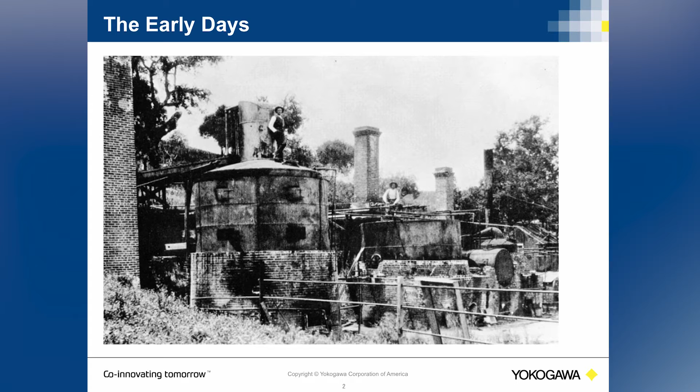Water tube boiler patents can be found dating back to the 1700s. Both types of fired systems, boilers and process fluid heaters, were very crude in design and relatively small in scale up until the 1910s and 1920s. As the demand for capacity increased in the residential, commercial, and industrial sectors, so did the size of the fired systems. This coincides with the understanding of heat transfer and the development of quantum theory and its application to fired systems.

While working on a neighboring boiler's oxygen analyzers, I was able to see the first boiler installed at the old Gulf refinery in Port Arthur, Texas, which is now Valero. It was built before 1910 and was put together with no welding, only rivets. Kind of shocked me. We have come a long way as an industry since these days in the design of fired systems.

However, very few changes have occurred in the science of flue gas analysis and the use of these measurements in controls and protective systems.

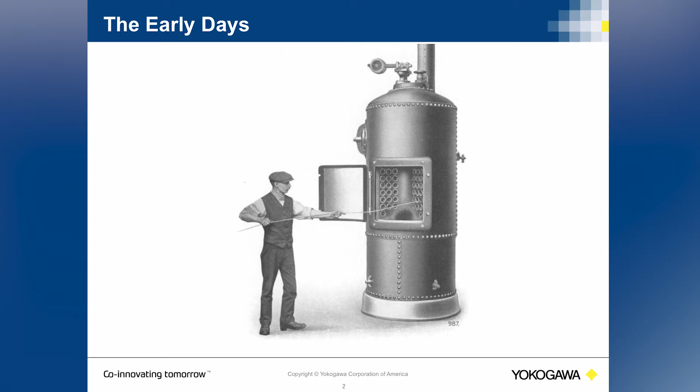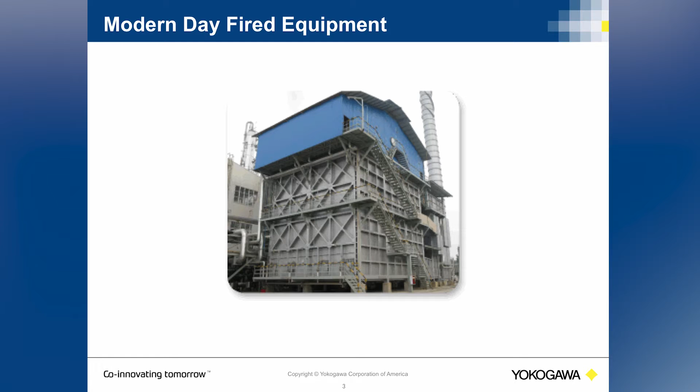Today, fired heaters have taken on many forms and are designed for very specific functions. The modern-day process fluid heaters commonly used in refineries were developed in the late 1940s and 50s. The basic design elements have changed very little, though materials of construction have had some advances in thermal efficiency. The companies that design them have an intimate understanding of the purpose of flue gas as it relates to transferring the generated heat into the process fluid, whether it's used for vaporizing, cracking, or just heating.

This understanding of the impact of flue gas composition is largely lost between the heater designers and the people that are actually operating them. These folks in the field responsible for maintaining and operating the equipment are very aware of the potential hazards associated with the fired systems.

Also, most fired heater manufacturers are not responsible for the controls, instrumentation, or protective systems, but rather only build a guideline of how it should be operated. This missing link between an ideal design and antiquated approach to controlling the equipment has only recently been addressed.

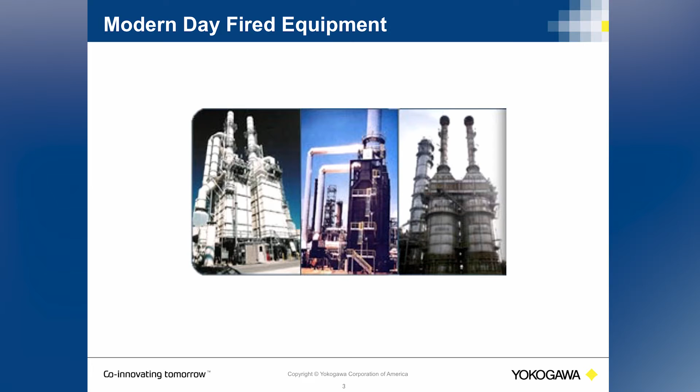While boiler codes such as the NFPA 85 go into a great deal of detail on how the equipment should be designed and maintained, there is very little information on how the flue gas should be instrumented, controlled, or used as part of a control system or protective system.

This vacuum for a baseline of design has led the American Petroleum Institute, which is the largest collection of users, to build a recommended practice for oil and gas-fired heaters, which was released, the latest version released in 2008.

And in the absence of a universal standard for process fluid heaters, such as the NFPA provides for boilers, several petitions were made to the API to elevate the status of their recommended practice, number 556, to a standard so it could be used as the benchmark for the design of protective systems.

I've had the good pleasure of sitting in on these 556 meetings twice a year for the last few years, and I'm very proud of the progress they've been able to make in this area.

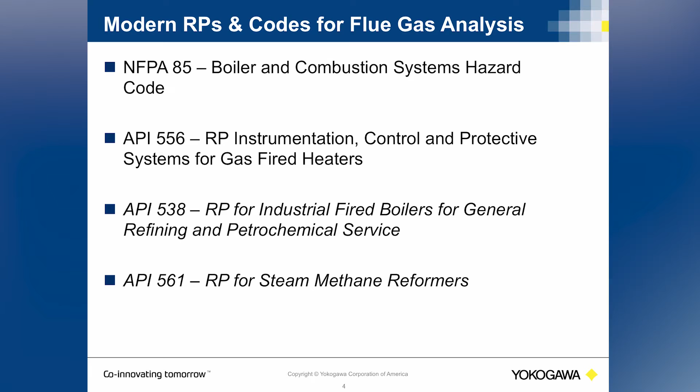And to give you an idea of the magnitude of relevance fired equipment has in our world, here's the breakdown of the total energy consumed in the manufacturing sector just in the USA. These statistics were gathered in 2002, which was the last time the U.S. Department of Energy delineated the data into these types of categories, which includes fired heaters and steam generation.

The total consumption in 2014 was about 27 quadrillion BTUs of energy, or 27,000 trillion BTUs of energy.

Assuming these percentages are close to the 2002 values, that would equate to over 18 quadrillion BTUs of energy consumed just for fired processes in the USA. As we will cover in this presentation, even the most state-of-the-art heaters are only about 60% efficient at transferring the heat energy from the fuel source into the process fluid.

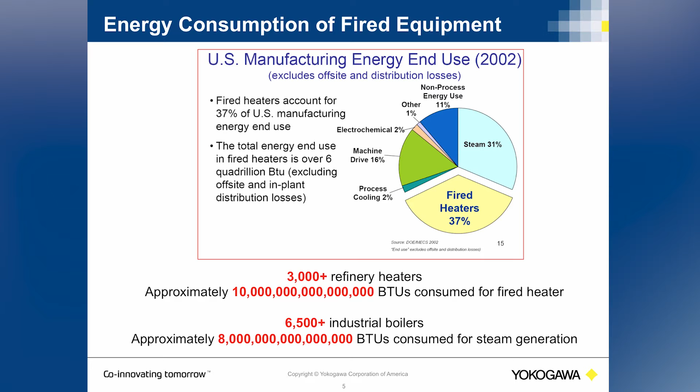That brings us to today's topic of flue gas, which is the byproduct of oxidizing fuel and air. As heat energy is a major component in most industrial processes, the most common way to obtain heat is by burning fuel and oxygen. Burning pure oxygen poses many risks and requires the separation of nitrogen, so the common medium for oxygen is just to use ambient air, or in some cases even preheated air.

Fuel can be anything that burns, but in most industrial settings, that would be coal, fuel oil, or a mixture of hydrocarbons and hydrogen. The ideal product of this process is a mixture of water vapor, CO2, and nitrogen, and it would also produce heat.

CO2 and water vapor are the critical gases in the mix that actually radiate the generated heat. Nitrogen and oxygen do not absorb or emit any substantial level of heat energy, and increasing their concentration in the fuel-to-air ratio would only dilute the flue gas.

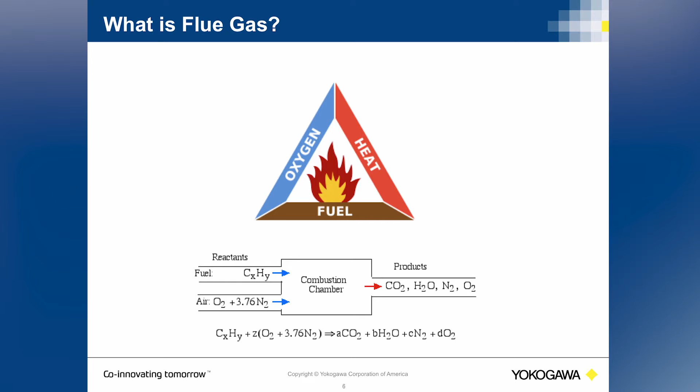Theoretical air, or the amount of air to completely oxidize the fuel with no oxygen left over, would only provide the byproducts of nitrogen, CO2, and water vapor. This is what we would call a perfect stoichiometric mix.

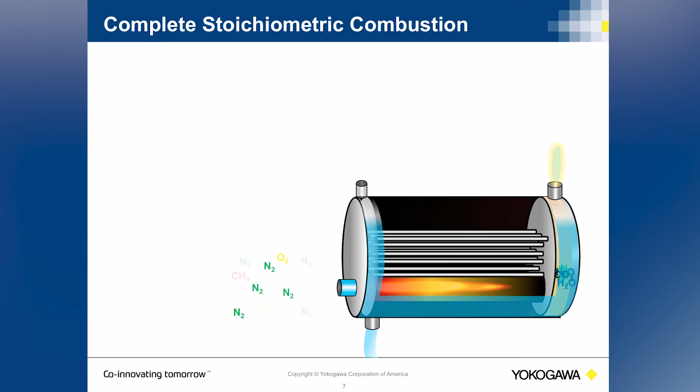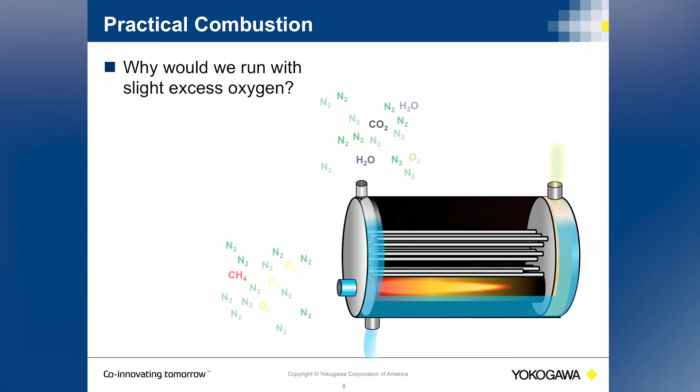What you should see in the field are systems running with a minimal value of excess oxygen, as is the intended operation of the system design.

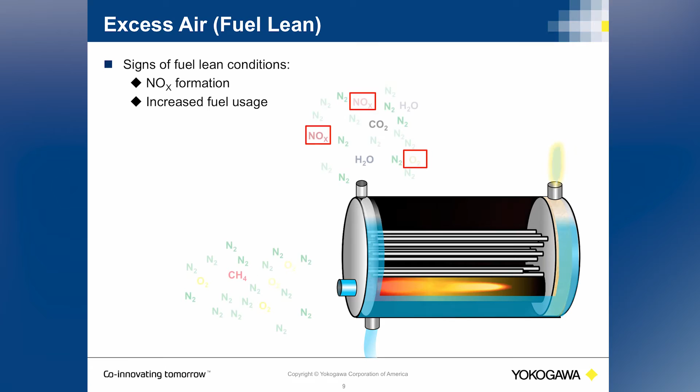Unfortunately, most fired systems are operated with elevated levels of excess air. Nitrogen and oxygen dilute the water vapor and CO2, and in high levels react in and around the flame to form NOx, which is a heavy pollutant.

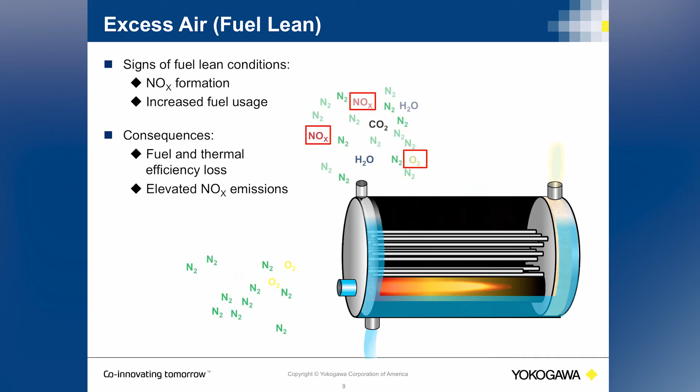If the air-to-fuel ratio goes fuel-rich, the byproducts would also include CO, possibly hydrogen, and if there was enough fuel present without enough oxygen, the flame could possibly go out and even be producing fuel. So if methane was the fuel in this case, on this little Scotch boiler, you would see the possibility of methane going all the way through the flue gas.

The possibility of pouring these combustible gases into a chamber that is already on fire is the most common reason operators prefer to supply very high levels of excess air, which in their mind acts as a safeguard.

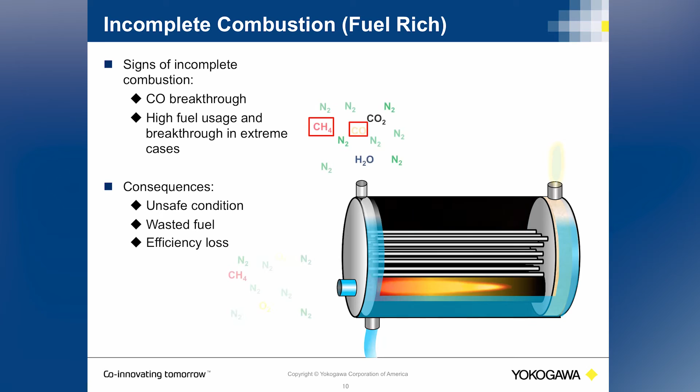Another consequence that's not commonly known to running a system with a fuel-rich mixture is also a loss in flame temperature, or a less temperature in the flame.

Although there have been many advancements in fired heater construction and use, very little change with the instrumented systems relating to the fuel to air and the mixing.

When fuel systems were first on the industrial market and sized accordingly, fuel had a very consistent air demand, as it was either a constant flow of pulverized coal, fuel oil, or natural gas.

As industrial facilities grew in size, many of them learned to capture the off gases around the plant and mix it into the fuel. Unfortunately, the instrumented systems have seldom been upgraded to adapt to the continuous fluctuation in air demand.

Most facilities that use gas for fuel measurements do account for BTU content, which typically goes to the environmental governing body, but that BTU content is not used in any type of feed-forward design for a control system.

So what you'll see on most typical systems in the field, on the fuel side of the fuel-to-air ratio, is only a volumetric measurement of fuel. And there's also a control valve that's typically controlling the pressure that is manipulating the amount of fuel delivered to the burners. But there's no compensation for a density change.

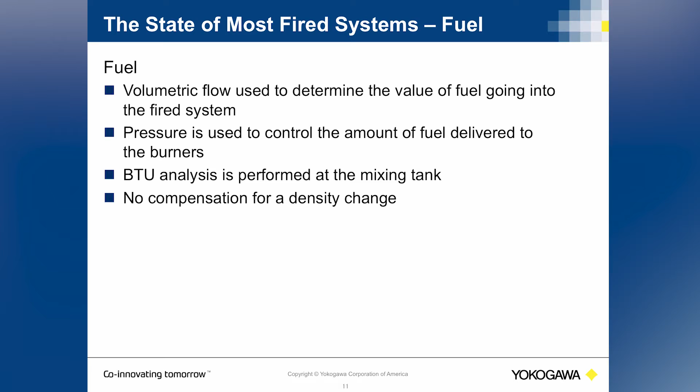So not all gas forms of fuel have the same type of air demand. And here's an example.

So if methane was used as the primary source of fuel, you can see that 1 mole of methane requires 2 moles of oxygen. Well, again, we're not putting pure oxygen into the burner, we're putting air into the burner. So subsequently, 1 mole of methane requires about 9.5 moles of air.

Well, if the system were to go propane rich, which does happen in refinery settings, 1 mole of propane requires about 5 moles of oxygen, and the result is you get a higher value for CO2 and water vapor. 1 mole of propane would require 23.8 moles of air. So the air demand of propane is 2.5 times greater than the air demand of methane.

Very few systems in the field have any type of feed-forward information for a rapidly changing fuel content, and this is where the systems rely on the feedback measurements of the flue gas analyzers.

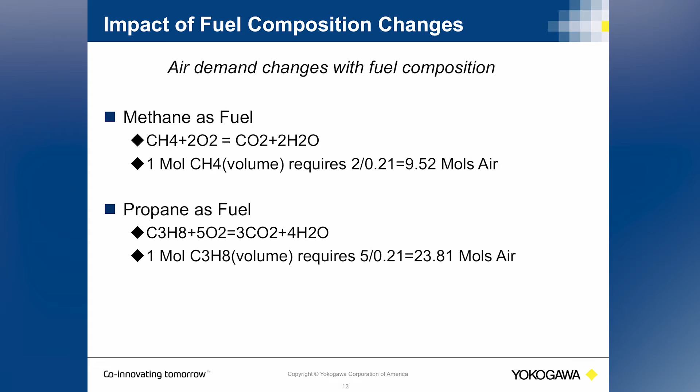On the air side of the systems, very few fired systems actually measure the air flowing into the burner, and fewer still have the ability to modulate the airflow to keep up with a changing fuel source.

Fired systems have many different types of motive forces for the air to move through the heater. There are systems that use a forced draft, with a blower to push air into the burners. Some use an induced draft fan designed to pull air through the heater. A balanced draft system has a fan on both sides, the high and low side of the heater, to create a constant flow in both directions.

But most refinery fired heaters are what we call natural draft, and they use the buoyancy of the heated gas inside the flue to continuously pull air in, creating a vacuum inside which naturally allows the air to flow through. In all cases, there are some typicals.

One of those is that there's no air measurement of volume of air flowing into the burner. So, like I said earlier, there's no density, no mass flow of fuel going into the burner, nor is there an airflow going into the burner.

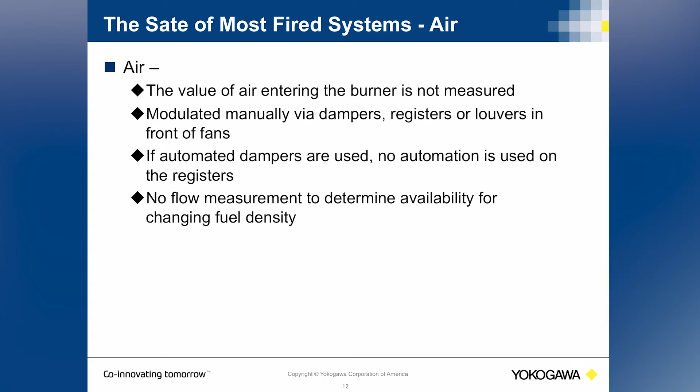No matter the fuel or air control mechanisms, the design of the system is to operate with a minimal concentration of excess air in order to facilitate the required heat transfer. It is well understood through practice that there are efficiency gains by operating with less excess air.

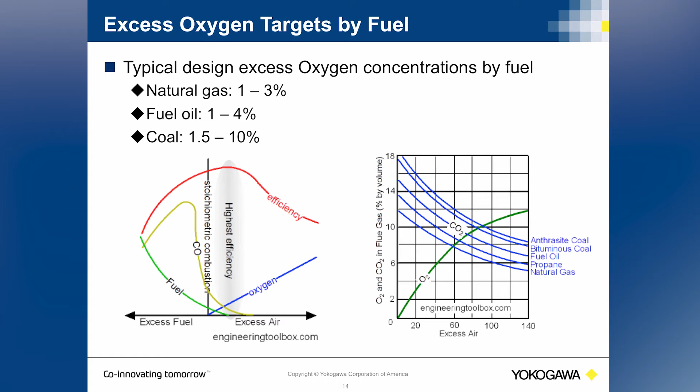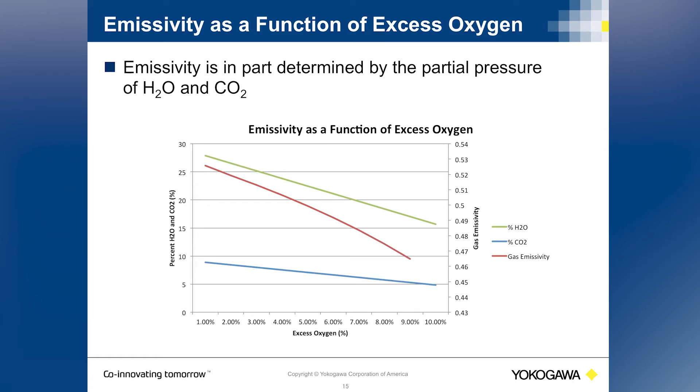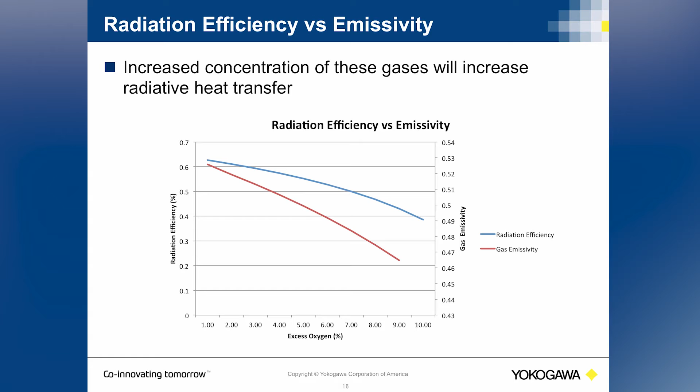And whenever you impact that partial pressure, not only are you diluting the critical components for heat transfer, but you're also affecting the gas emissivity overall. And as that gas emissivity drops, the loss of heat transfer falls with it, or radiation efficiency. The net result of increasing the excess air is the requirement of more fuel input into the system to compensate for the loss in radiation efficiency.

And they went out into a reactor to make hydrogen. They were operating the system at about 7% excess O2 and wanted to lower it as much as they possibly could. So we built a calculation to show them what the gain would be, taking it from 7% to 1%.

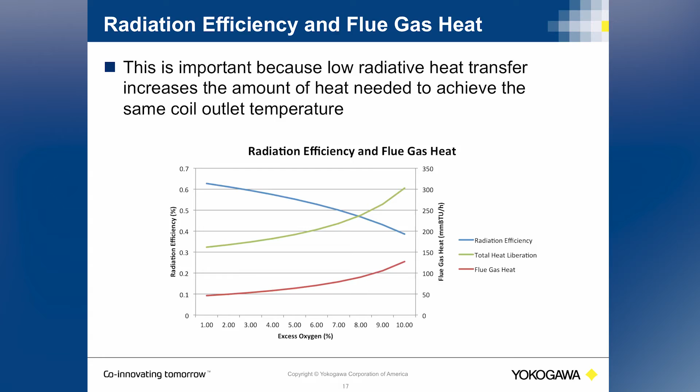So the API wanted to build some very generic terms on where to set this magical O2 set point. At these seminars, I would ask the room, where should the O2 set point be on a process-fired heater? And we would go around the room, and you would hear 3%, 2%, 1%, 5%. And if you were talking to the operator, they might say 8%. But in all actuality, there is a way to come up with a both efficient and safe means of evaluating where that O2 set point should be for every type of fired heater.

So some of the language that they use in API 556 is that in order to determine the O2 set point, you should do a combustibles breakthrough check. That means manually lowering the air to find a place where combustible breakthrough occurs. And there are many variables that would impact where that's going to happen, including tramp air flow rate, condition of the burners, fuel gas composition, bridge wall temperatures, but also wind fluctuations, wind direction, barometric pressure, and potentially operator error. So as I say, the combustible breakthrough would typically occur between 0.5 and 2.5%, but it could be outside of that range.

So once you find that value where combustible breakthrough occurs, then you need to establish the O2 set point. Finding the breakthrough doesn't give you the set point - that just gives you the point where you know you're producing combustibles. Finding the set point, you should have some evaluation of the overall system to determine that if you had a process step change, a change in the load or a change in the process, you would be able to have sufficient time to correct the combustible occurrence if it were to happen.

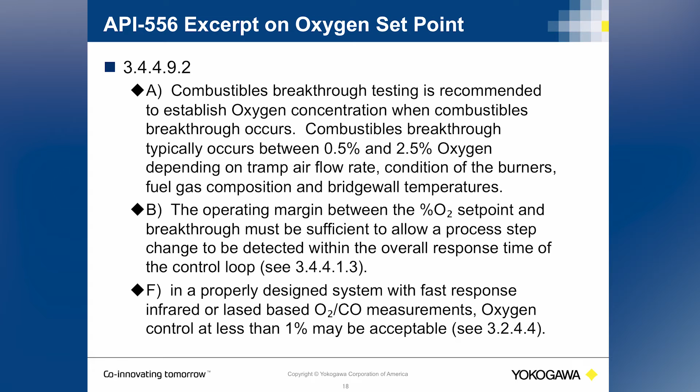So here's an example of what that process would look like. This was a client very early on in our development of the TDL technology, and they were wanting to determine what kind of efficiency they could squeeze out of a furnace before making any modifications - before buying new burners, before coating the tubes, before they were even potentially going to replace the entire convection section, hoping to get some more throughput. So they normally operated the heater at about 4% excess O2.

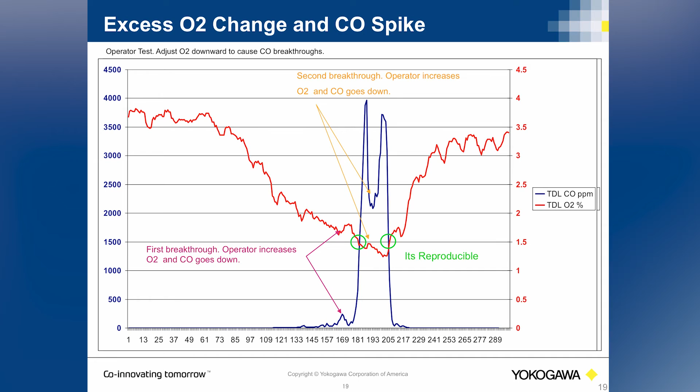Understanding that oxygen and combustible type analysis can provide some value, we wanted to look back and see exactly when in history people started to understand the value of trimming boilers and process heaters.

In our search, we found this article from 1922 from Power Magazine, and inside of it there's this great statement: in order to tune it, the operator would have to have an ORSAT, a wet chemistry type of analyzer, equipped nearby the heater, and take grab samples out of the flue gas.

And put them through the reagents, and it would give them values for CO2, oxygen, and CO. So in 1922, the operators would have to learn how to work the process, and it would take about 15 minutes to come up with these values to determine if they needed to manually change any of the settings on the heater or on the boiler.

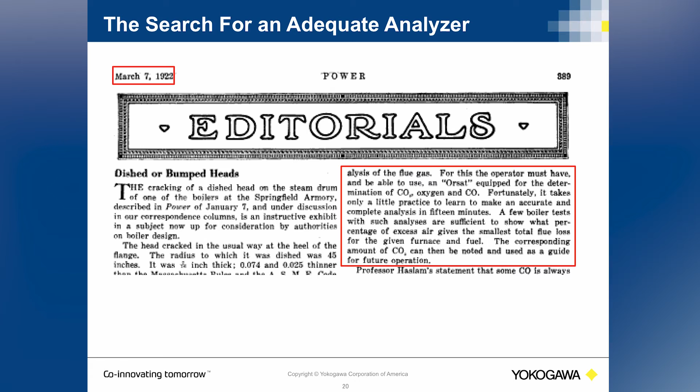Fast forward almost 100 years, and today there are many common measurements used in flue gas analysis, including oxygen—probably the most common measurement—and it's a great key indicator as to the performance and safety state of the fired system.

Most common technologies used on fired systems are paramagnetic, zirconium oxide, and now we're seeing a lot of these tunable diode laser spectrometers used in oxygen. The paramagnetic is primarily used for emissions monitoring.

These analyzers require that you pull the sample out of the furnace and remove the moisture content, and that creates a bit of a volumetric error, but that's typically okay for what they're using them for. I have seen operators on large crude heaters and refineries use the paramagnetic value for trying to trim the heater.

I was doing an audit on this crude heater, and there were 13 burners, a floor-fired system, and each burner had the capacity for about 20 million BTUs of energy.

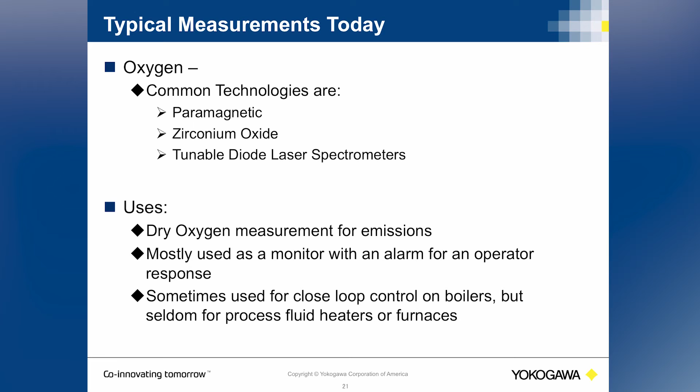The most common measurement other than oxygen has been what we refer to as combustibles. The original analyzer sensors used in flue gas analysis were developed for the safety of personnel in mines, which was a giant scientific leap compared to lowering a poor canary down into their possible demise to find out if there was sufficient oxygen or any toxic gases.

The most common gas that it's trying to key in on would be CO. So in most cases, these are held at the temperature at which CO reacts and oxidizes, and this is why it's most commonly called a combustible analyzer. The common uses for this technology are usually an indicator for an upset.

They're not able to diagnose exactly which type of upset event has occurred, but it does give you an idea that there's something going wrong inside the heater, because this type of sensor can't distinguish between CO, which would be the consequence of incomplete combustion, and hydrogen or methane, which would typically indicate a loss of flame. Sometimes we have seen these tied into safety instrumented systems, but it's a very rare exception.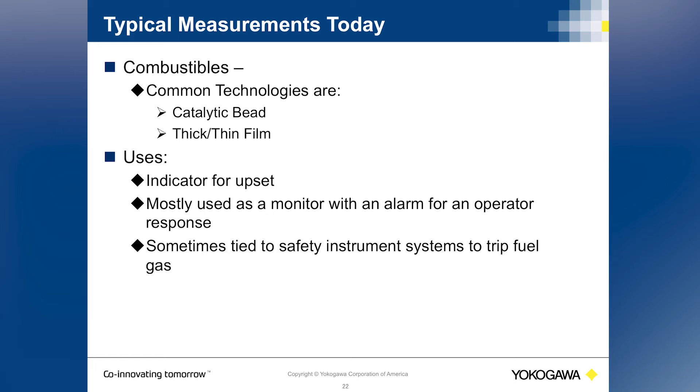There are some analyzers that have the ability to measure CO specifically, and the most common devices are infrared photometers. The most common infrared photometer you would see would be installed on the stack of a fired process, as they have an upper temperature limit of about 300 degrees C and a maximum distance of about 30 feet. So installing one of these inside a firebox just isn't feasible with this type of technology.

Another option is laser spectrometers. There are different types of lasers that can be used, from distributed feedback to VCSEL to diode lasers, quantum cascade lasers, interband cascade lasers. All of these can typically be tuned to a CO-specific wavelength. These technologies have only been around for a couple decades and commonly used in the last couple decades. But again, the CO-specific measurement can be used as an indicator of some type of upset condition.

If you were to look at a type of fault tree analysis, you would see that there are many potential sources of the type of upset that would lead to CO being generated in the flue gas.

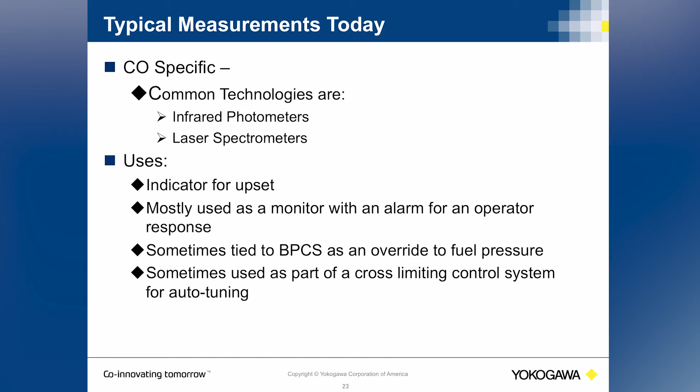Another type of flue gas measurement that has become more relevant of late is methane specific. Again, the combustible analyzer is not necessarily tuned for methane. Though there are catalytic bead and thick/thin film technologies that can be tuned to methane, just because it's called a combustible analyzer does not mean it will pick up methane as part of the sensor response. Laser spectrometers are also becoming more prolific in this area.

Methane-specific measurements have also been used as a startup permissive on the purge cycle. If you're not familiar with the startup procedure on a boiler or fired heater, before they light off the pilots, they typically purge it with steam, and this is to remove any potential fuel gas that might be in the system. So the methane-specific measurement—we've seen it more common now—is used to determine that the purge cycle was effective.

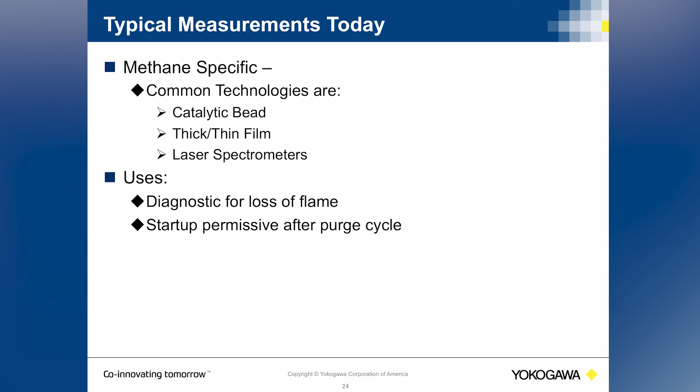Getting a little deeper into the oxygen analyzers, again, the most common type of oxygen technology is zirconium oxide. This sensor was developed in the 1950s and purchased by Westinghouse, but the technology applied to fired heaters really wasn't adopted in the industry until probably around the 1980s, when we saw it very commonly used and considered the most effective technology. There were a lot of reasons why this technology was popular.

One, it was relatively low cost. What you'll see in most, especially refineries, is a distillation column with layers and layers of instruments and advanced control, and next to it is a fired heater with maybe one control loop. So very little money has been invested in these fired systems, but fortunately these zirconium oxide analyzers came in at very reasonable cost, and were also very reliable, one reason being this was a solid state sensor.

What you're seeing on the screen are a few different varieties of how the sensor would be exposed to the flue gas. The sensor does have to be held at about 700 degrees C for it to operate with the most efficiency. It will be able to measure oxygen at lower values than 700 degrees C, it's just not as effective and doesn't have a good sensor response.

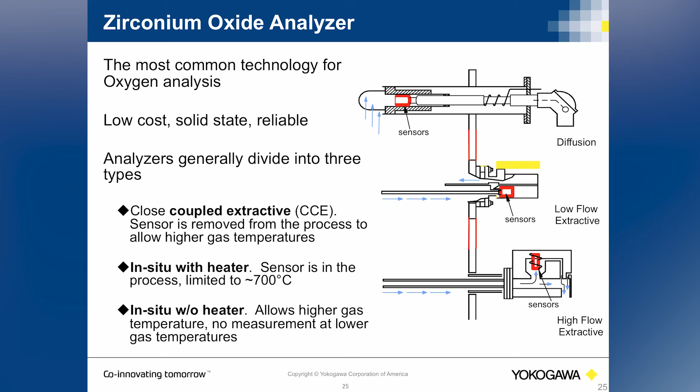The API wanted to be very clear that there are some concessions or concerns with the use of zirconium oxide for flue gas analysis.

These two statements show one of the most critical times in measuring oxygen as part of a protective system: if you go sub-stoichiometric or fuel-rich and start generating hydrogen or even CO. It says that if you have hydrogen, CO, or even methane, it has the potential to mask and falsely lower the true O2 value. That has to do with these components actually oxidizing in and around the sensor, consuming the oxygen and causing that false low value.

Another aspect of zirconium oxide sensors is that they require reference air, typically instrument air. If the facility uses nitrogen to back up the instrument air, and the instrument air goes down so the plant switches over to nitrogen, all of your zirconium oxide analyzers would fail high. If they're tied into a closed loop system and you have a false high reading, there's a potential that it would actually drive up the fuel pressure to overcompensate for what looks like too much excess oxygen in the system.

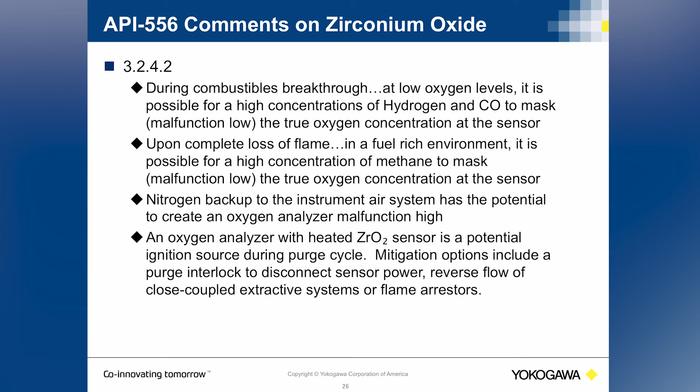So they list some mitigation options to try to mitigate the potential hazard of that spark plug causing an explosion inside the heater. But this has been the point of much consternation, especially in the boiler world with the NFPA.

Dow Chemical learned this and made a great publication at the Ethylene Producers Conference, about 8 years ago, where they had an ethylene furnace, a very expensive fired asset, that was turned off for maintenance, but they had a zirconium oxide analyzer in the stack, and it even had what we call a flame arrestor on it. The flame arrestor is a sort of sintered metal designed to diffuse any potential fire around the sensor.

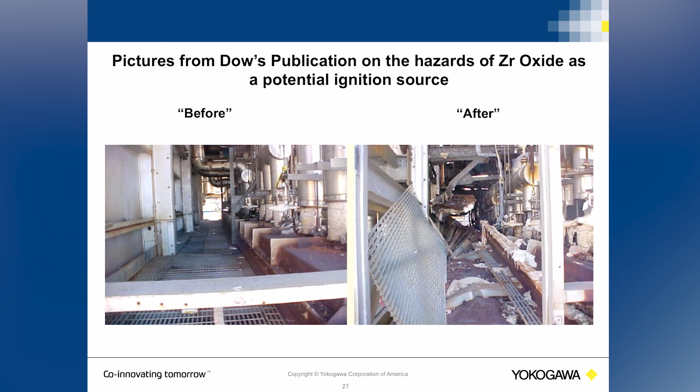Well, the sensor was left on, so it was cooking at 700 degrees C, and there was a flame arrestor, which was designed to be a layer of protection. They had a leaking fuel valve inside the heater, and it filled the entire flue up with fuel gas. The investigation determined that it was the zirconium oxide sensor that sparked the explosion, even with a flame arrestor.

So the NFPA has built some language into NFPA 85, and the language has changed a few times in the last few years. Back in 2012, their language said that users should use flame arrestors. So we started selling hundreds of these analyzers into the market, and almost all of them had flame arrestors on them. It wasn't but a few months later that we started getting a lot of phone calls.

In the NFPA 85 document, they did not mention that the flame arrestor would impact the T90 response time. What was a T90 response time of 5 seconds without the flame arrestor could become up to a minute or two, depending on the condition of the flame arrestor.

In 2015, they revised this to say that flame arrestors may be ineffective at mitigating an explosion, and they recommend that you cut the power to the sensor in the event of an upset, which would mean that you'd be basically running blind during an upset for your O2 value.

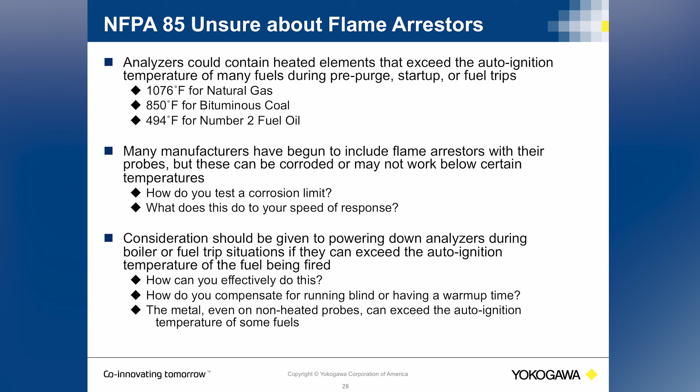But it wasn't well taken into consideration that even if you cut the power, the cell was going to be above the auto-ignition temperature for the combustibles, and that period of time cannot be defined, as all of these conditions would be changing. Depending on your fuel, you could have different levels of sulfur or other corrosive gases. How would you test the corrosion limit of these flame arrestors? And what is the acceptable response time if it's being used as part of a control system? So there's a lot of unanswered questions that we've certainly been trying to educate the industry about.

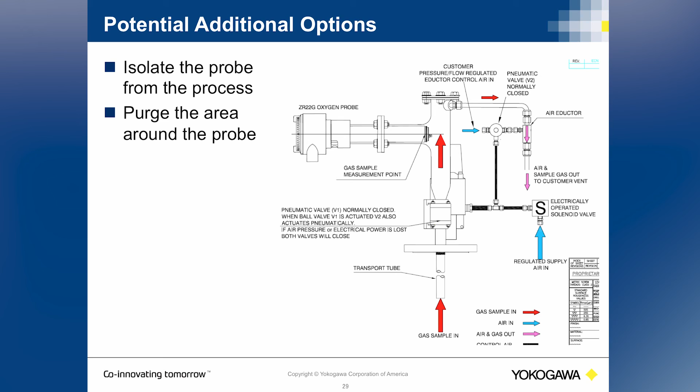One of the systems we've come up with is to automatically isolate the heated sensor from the process if you have an upset. So what you see is an oxygen probe attached to a closed couple bypass or slipstream, where the sample is motivated via an eductor and continuously pulled out of the process and swept across the zirconia probe. If there's any type of upset in the system, you could send a signal from the control system or a safety system that would automatically shut a pneumatic valve. This is being implemented more and more, and now the cost of what was a relatively inexpensive oxygen sensor has increased tremendously.

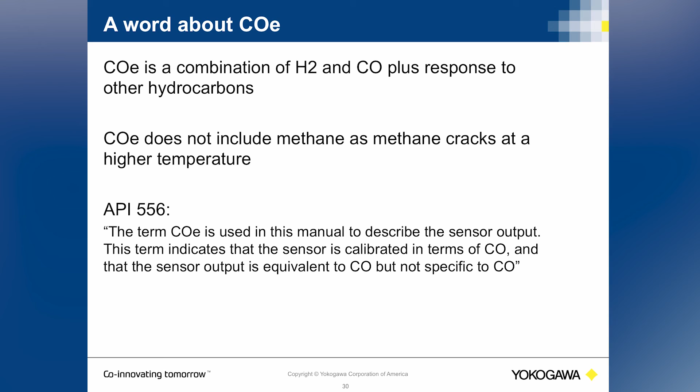The other type of commonly measured flue gas is what we call combustible. The API wanted to make it very clear that there's a difference between CO and combustible. In their statement, they spell out that the sensor response is calibrated to CO, but is not specific to CO. Hydrogen does have a response factor, but it isn't as strong as CO. Methane has a very small response factor for the temperature where CO is tuned.

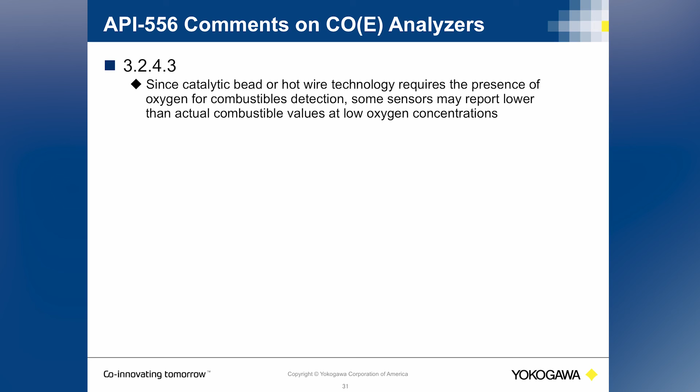The API wanted to put out some language on these potential concerns. The catalytic bead or hot wire technology is oxidizing the combustibles on the sensor, and in order to do that, you have to have oxygen present. So if the heater is running substoichiometric and there's not enough oxygen present, and you have combustibles, you might actually report a lower than actual value at low oxygen concentrations. This is in the unsafe direction, and manufacturers have attempted to put in some safeguards. One safeguard would be reference air instead of using the oxygen in the flue gas. Since methane cracks at a higher temperature, it requires a separate sensor tuned specifically for that constituent.

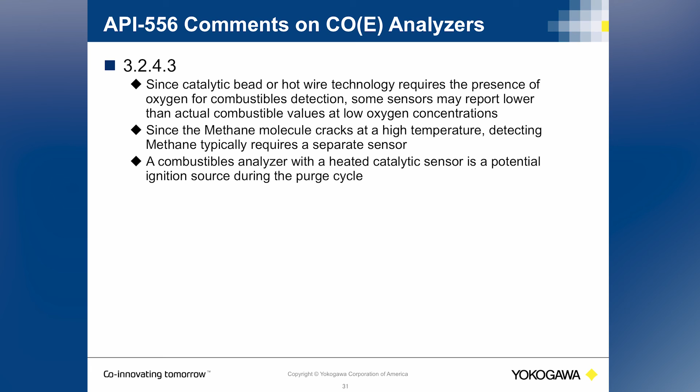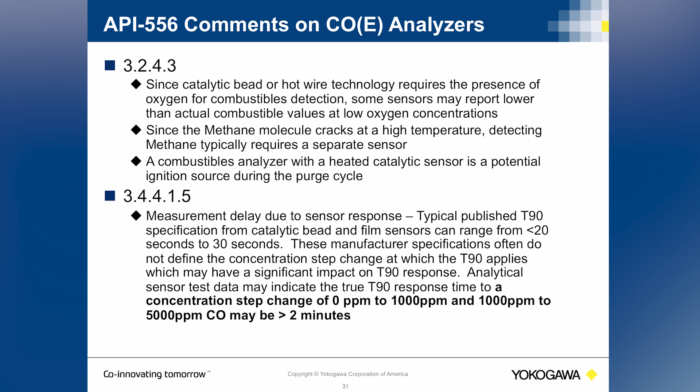Combustible analyzers are also a potential ignition source. If you're using this device as a layer of protection, you should understand that the sensor is heated above the ignition point of the fuel gas in many cases, so this would also require flame arresters and potential isolation. The manufacturers do publish a T90 time, but they don't tell you exactly what step change is associated with that response time. So while they may have a T90 of 20 or 30 seconds at a percent level change, it may not be indicative of a ppm level change.

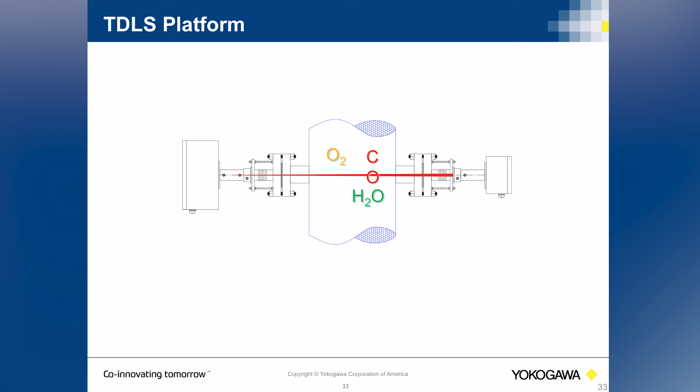The TDLS platform is an adaptation from filter photometers used across the stack, and these platforms were first applied to fired heaters on the stack for measurements such as HF, HCl, and ammonia. Dow Chemical had the idea to adapt this platform to an ethylene furnace. There are many advantages of this type of platform, and I can't get into all of those today. But the development of the platform for ethylene furnaces was part of a Department of Energy program launched in 2007, and it's a very detailed report that goes into specifics about the TDL diagnostic, other advanced diagnostics, and the control algorithms used to automatically tune furnaces, fired heaters, and boilers.

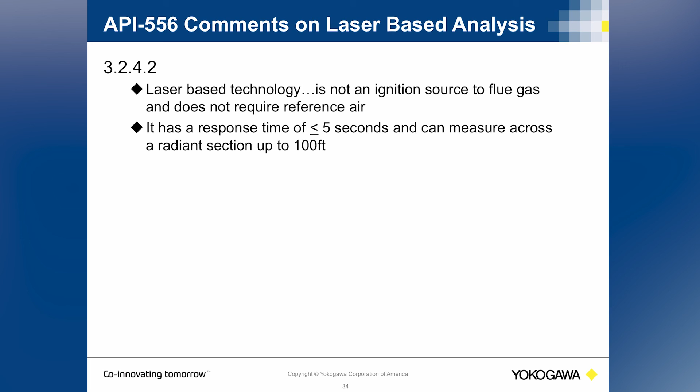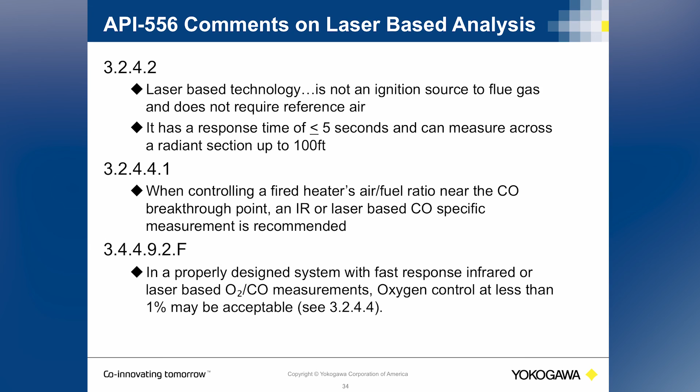In 2007, the API invited Yokogawa to give a presentation to the committee, with about 150 people in the room representing most major companies. They weighed the information we presented and decided to include it in the latest revision of the 556 in 2008. They wanted to spell out that the laser-based technology was not an ignition source and also did not require reference air, and no matter the step change, has a response time of under 5 seconds and can shoot over spans of up to 100 feet. I think the longest we've done is about 96 feet. Also, when controlling the fired heater's air-to-fuel ratio near that magical CO breakthrough point, it's recommended that you use an infrared or laser-based specific measurement. I know we're on a timetable here and want to get some questions in.

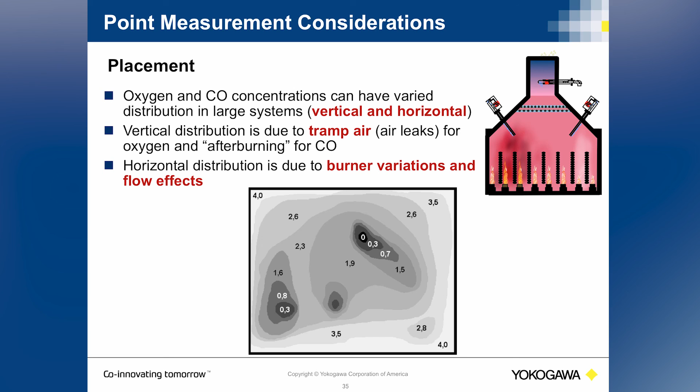I'm going to briefly go over placement considerations for these flue gas analyzers. The most common placement with traditional technology was to put the point sensor either down inside the radiant section or up inside the stack. Different design considerations apply, but there are different types of distribution errors associated with both techniques. If you put the analyzer in the stack, there's a potential that air would leak through the convection section and elevate the O2 value over the actual value of the flue gas. And CO does burn—it's a combustible gas. If you have CO in the radiant section, it doesn't always necessarily make it to the stack, as it would be burning through the convection section.

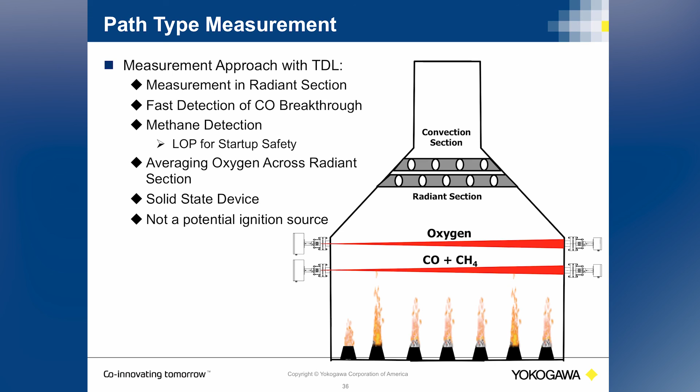The approach with tunable diode laser spectrometers is that you can put the measurement down inside of the radiant section, avoiding the problem of tramp air ingressing into the convection section and CO after-burning. It also gives you an average measurement over the entire span of the heater, no matter how large it may be. The API does have some recommendations on where to put these critical measurements.

They say you should take the measurement as near as possible to the point where combustion is complete. Now it's not always possible, as the vast majority of the systems were designed in the 50s, 60s, and 70s, and weren't designed to accommodate flue gas analyzers. So retrofitting is normally required.

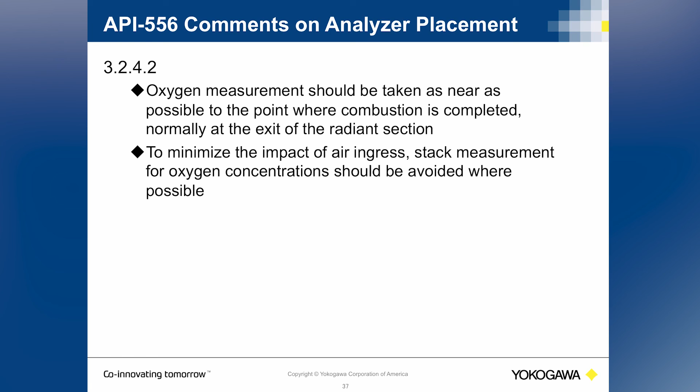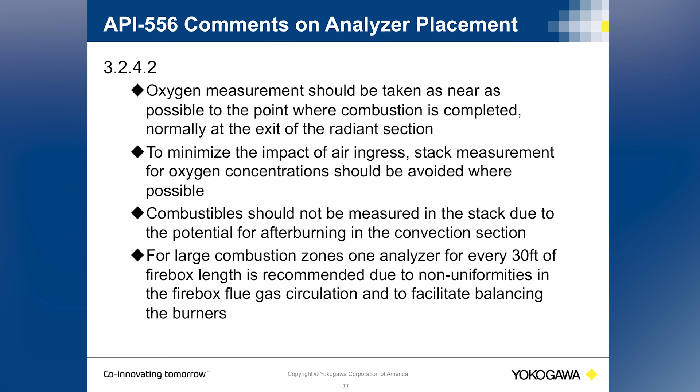Also, to minimize the impact of tramp air, you should avoid measurements in the stack, both for CO and O2. For large combustion zones, at least one analyzer for every 30 feet is recommended due to non-uniformities. A wind change could actually change the compositional oxygen across the furnace from high on one side to high on another.

So multiple analyzers are usually required. The typical fired control system as it stands today, especially for refinery process heaters, has an airflow that is set but not measured, nor is it automatically modulated.

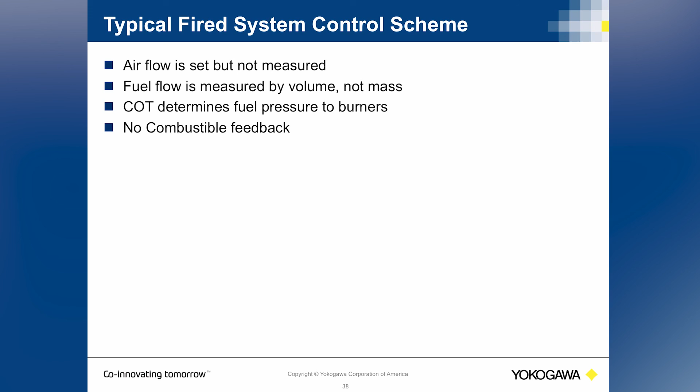And the fuel flow is not compensated for compositional change. The only control loop on the system is typically the coil outlet temperature changing the fuel pressure to the burners, and there's no combustible feedback.

So what the industry has seen many, many times can be captured in Murphy's Law: if it can happen, it will. So if the fuel density increases, the consequence is a flame that is cooled. You get a fuel-rich flame.

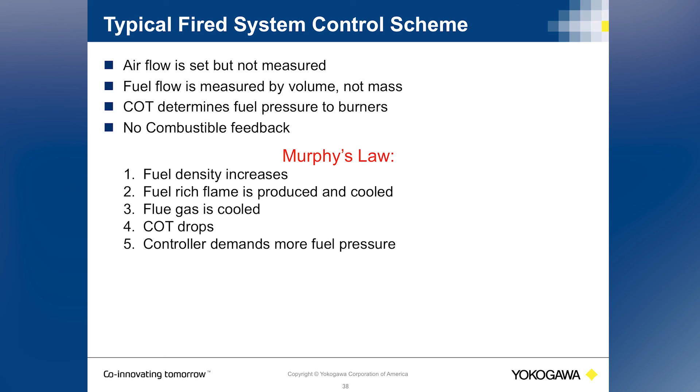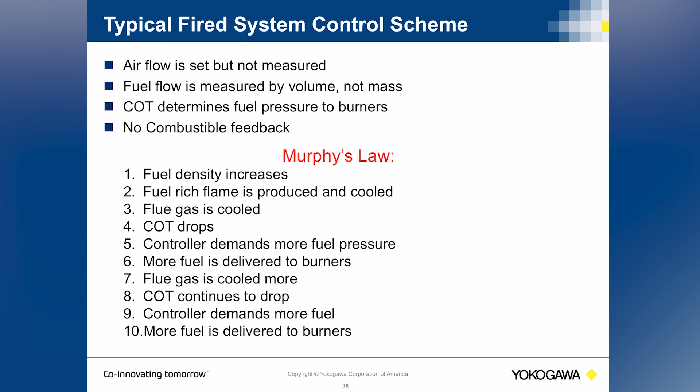If that continues with no check, no diagnostic, the flue gas is cooled, and that leads to a coil outlet temperature drop. If that continues to happen, the controller says, I need more fuel to increase the coil outlet temperature. More fuel is delivered to the burners, the flue gas is cooled more, and this cycle continues until something happens - typically a detonation of an accumulated combustible composition inside the heater.

And before detonation is deflagration. So a very simple approach to address the accumulation of combustibles inside the flue gas: Nova Chemical wrote a great paper, again at the Ethylene Producers Conference, and at the end of their paper they surmised that a very gradual decrease of fuel pressure is recommended rather than a sudden stop or even cutting the fuel off to the furnace.

The system they recommend is that a 1% fuel reduction should happen every T seconds, and it only takes a couple of variables to solve this formula for every individual piece of fired equipment.

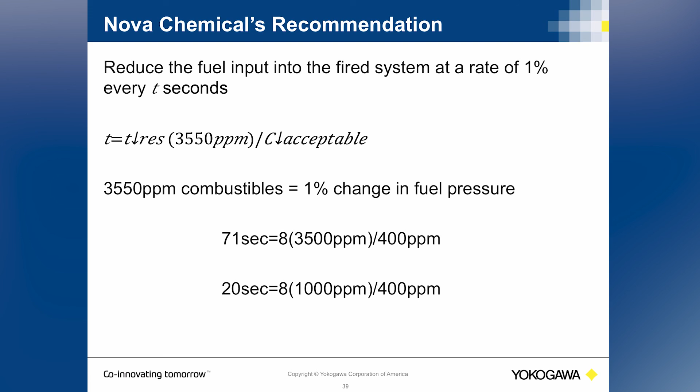But again, this simple CO override algorithm - we were able to prove it 13 times in a 30-minute time span, where we were manually trying to force up the fuel pressure to lower the excess O2. Whenever the CO level hit 400 parts per million, the override automatically adjusted the fuel pressure down at the necessary interval.

So I know we've covered a lot of topics today. I really appreciate your interest in the subject matter. It is very close to my heart.

My best friend growing up, I would go to his house as a kid every day, and his dad had severe burns all over his body. As a young child, I never questioned what happened. Later in life, in my teenage years, I finally asked him what caused the burns, and he said he was an operator at a refinery, and they had some instrument producing faulty signals on a fired heater. So he went out to investigate, and the heater exploded.

80% of his body had third-degree burns and severe disability for the rest of his life, but I was able to share the rest of those years with him. I'm very grateful for my company putting me in the position to learn the subject matter, and hopefully invoke some interest in you to want to see proper protective systems applied to these critical assets of fired heaters.